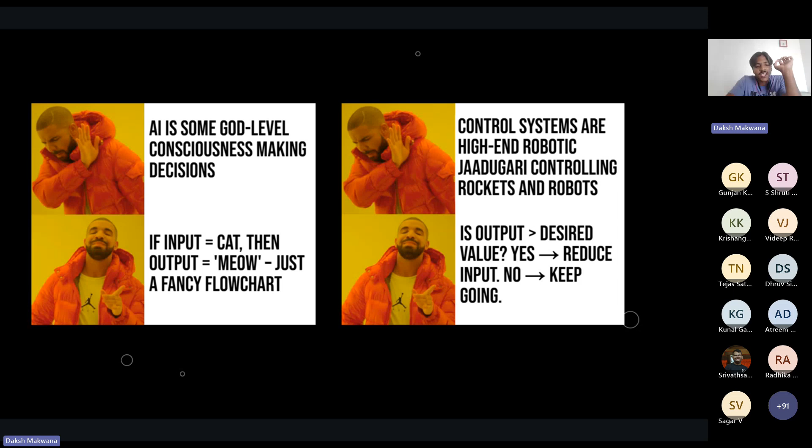And this is what we will be learning in this webinar. So let's start. The first question will arise like, why learn control system? I'd say because it's deeply related to AI. If we get to the highest level of ML, at the core, they are just: if input is this, then output that, otherwise do some other task. Control systems are almost deep down the same, but better. They are AI, but in the physical world - not just thinking about a prompt, but acting on it instantly and accurately. So we'll first understand what really is control and why it's needed.

Let's walk through a scenario. Imagine you are in your room and it's really hot. So you walk up to a room cooler and switch it on. Now it's too fast, so the fan of that cooler is making irritating noises, so you reduce the speed. Then it's too slow, so you increase it. And you do this until you've got that sweet spot in which the room gets cool and you're comfortable also. So what's really happening here?

You are taking the role of a controller. You sense the current state of how hot the room is, and based on that, you are adjusting the input to the plant using those regulators. And the output, which is airflow, gets changed accordingly. And this right here, my friends, is a control system.

So in this control system, there are processes occurring, and the control systems have one purpose: obtaining a desired output with the desired performance given a specific input.

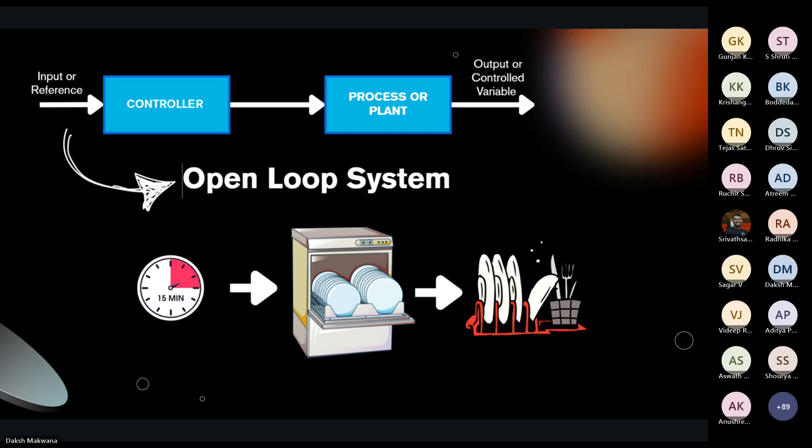Now we'll talk about how to control the output exactly by explaining these controller blocks and their types. Suppose you get H6 as your hostel, and you want to go from H6 to H15 for secret purposes, and I'll assume that it's 50 meters apart. So here you are, let's discuss.

This is the diagram we discussed. You want to walk 50 meters, and here you are the plant. Your brain is the controller, and your output variable will be your current location, and the controller will output a walking speed. Right now you want to walk to 50 meters.

Your current location is 0 meters from H6, so it gets inputted into your brain. One way your brain can think about it is getting the subtracted value, 50 minus 0, which was your current location, and we'll call it the error term. Your brain can multiply this error term by some coefficient, I'll take it as 0.1, and output it as the walking speed. So 50 minus 0 is 50, and 50 times 0.1 is 5.

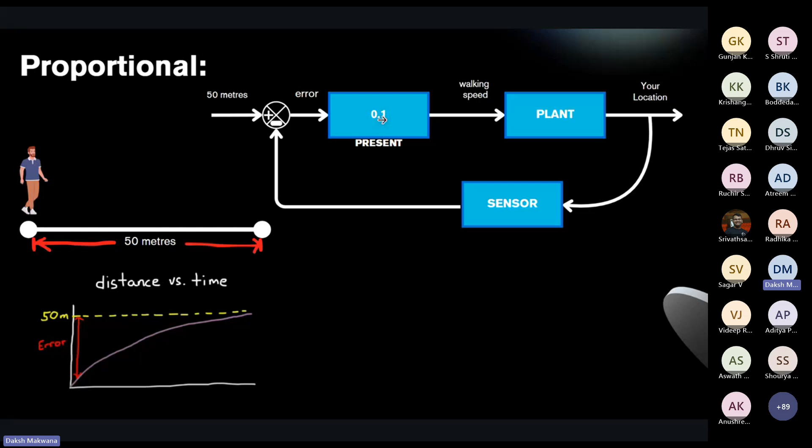This is what I told you about the proportional controller, because it has this coefficient. This is the distance versus time graph. At first your error will be 50 meters, but it will gradually decrease. The walking speed versus time could be like this: initially you are at 5 meters per second, so you're walking fast when you're further away, but then you walk slowly when you're close. Using this, you can kind of reach.

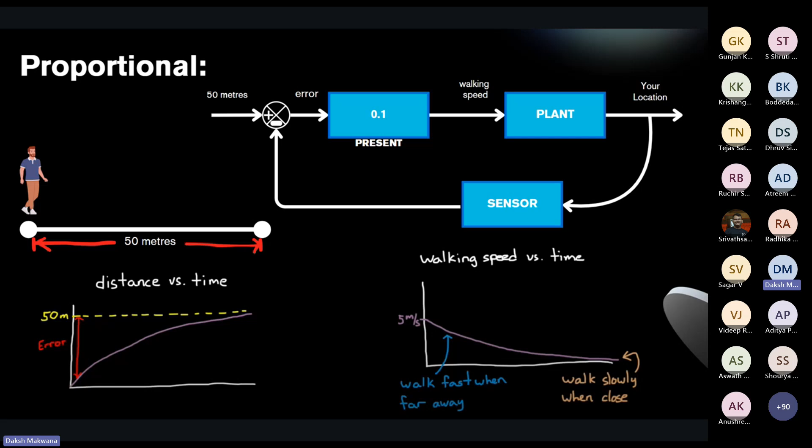Okay, but is this enough? Let's talk about a scenario in which it might not be. So drones, you might be familiar with it, in MS-101 we have created these drones.

So let's say we want to test this. What we want to do is fly this drone to 50 meters above sea level. For context, I'm defining the hovering state, which is nothing but when the lift produced by the propeller is equal to the weight of the drone. So it will neither go up nor down.

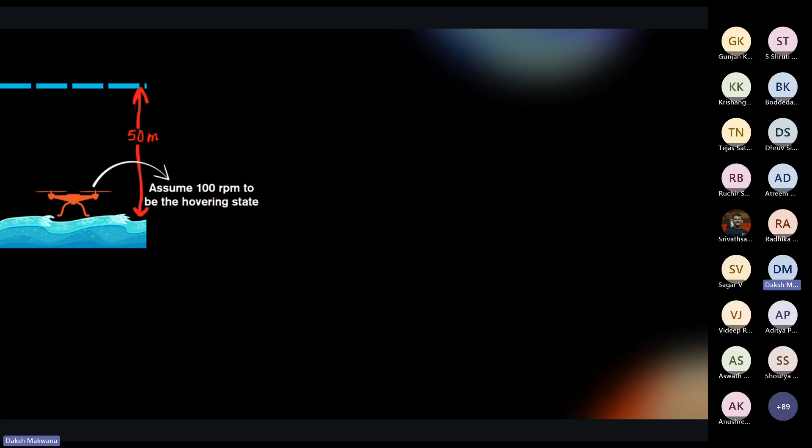This is the closed loop system of this drone, and here the output will be the current altitude. The controller will be like this, and I take 5 for our comfortableness, and it will output propeller speed. So let's just do this again.

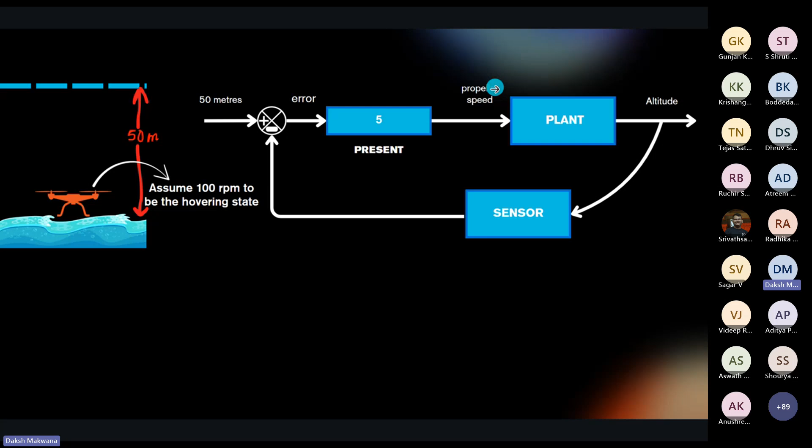Now there can be two cases. Case one is something like this: let's say your drone right now is at 30 meters above sea level. So what do you think happened? The error is 20 meters, right, and the speed is 100 RPM. So anyone want to guess what will happen after this? You can answer in the chat or raise your hand.

As I said, 100 RPM is the hovering state, right? So basically it will just hover. It will get stuck there.

The second case might be: let's say you increase your coefficient or something, and you're able to reach that 50-meter mark. So what will happen now? Error is 0, speed is 0. So what will happen now? Yes, it will just fall.

So what can we do now? In the proportional controller, we use the present information, that was your current altitude. So how about we use the past information? It could be something like this: we introduce the integrator path.

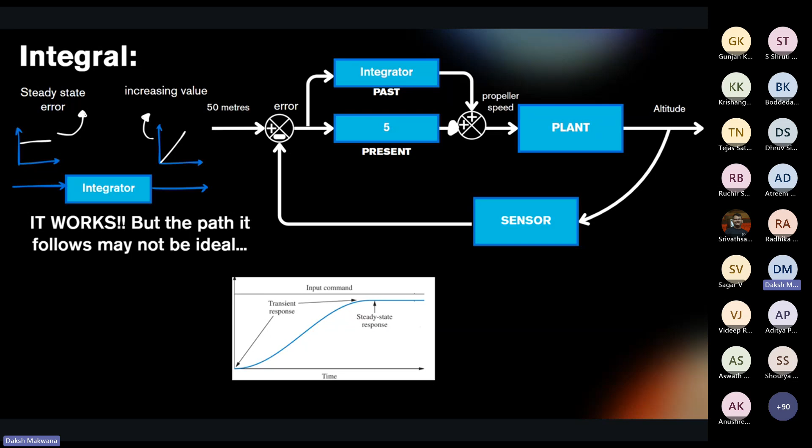But the path that it follows will not be ideal. Why am I saying this? The path should be something like this: you're at 0 meters, and gradually, taking your time, you reach the 50-meter altitude. But I just said something about adding and subtracting values -- subtracting -- so this basically means that this ideal path is not going to happen.

What will happen is, let's say you're just about to reach the 50-meter altitude -- this very small error will mean the proportional controller outputs almost no value. But the integrator path has been summing up values since the start, so the propeller speed will definitely be more than 100 RPM. So it's not going to hover. It will go above the 50-meter altitude, creating a negative error, which will cause it to decrease its propeller speed. By this adding and subtracting of values, it will reach the mark and then hover right there.

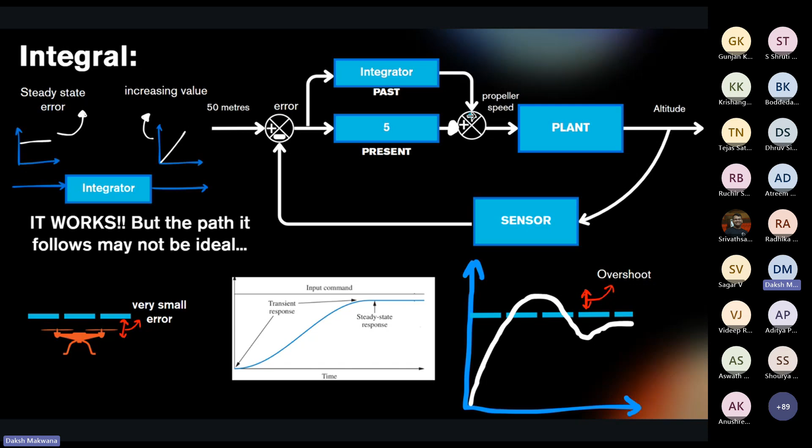So is there any way I can even skip this overshoot? I just want it to ideally reach, or somehow ideally reach, the target. We've talked about the present, then the past, so now it's time to peek into the future. But how? Using the differentiator part. Let's say your drone is quickly approaching that 50-meter mark.

That returns an error which is quickly decreasing, and by the nature of differentiation, when there is a quickly decreasing error, it will generate a negative value. So by joining this with our current controller setup, you get this kind of control system, and the negative value generated will act as a brake for the drone, slowing it down.

So this is the differential controller, and you've achieved it. Whenever the propeller speed increases really fast, the differentiator detects that the error is quickly decreasing, so it decreases the propeller speed accordingly.

So these are the three types of controllers. And if we work with all three of them together, we get a PID controller.

Now that we have the types of control systems and types of controllers, let's see what kind of outputs we can expect if we enter any kind of input. The only way I can think of is to use math, to first represent our system by creating a mathematical model.

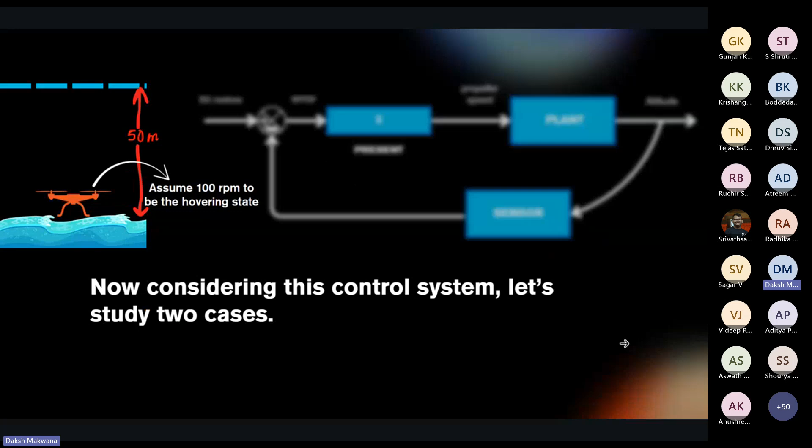So this was the case, right? You wanted to say, why not just increase its proportional value? So let's say I increase it to 100, instead of 5, I'll set it to 100. What will happen? At 1 meter, it will get stuck. It's just like this - you can say you'll increase the proportional value a lot, but it's kind of impossible to get that high a proportional constant value. That's why we use a different kind of approach.

I guess students are discussing among themselves. So no, no, yeah.

Just to clarify, he was asking why we shouldn't be adding a constant to make it hover there. The constant you're adding there is coming from the integral of the previous values.

Yeah, I think it's been clarified, the student clarified it. You can move ahead. So let's move further. If anyone has any more doubts, you can text it, he or she can text it.

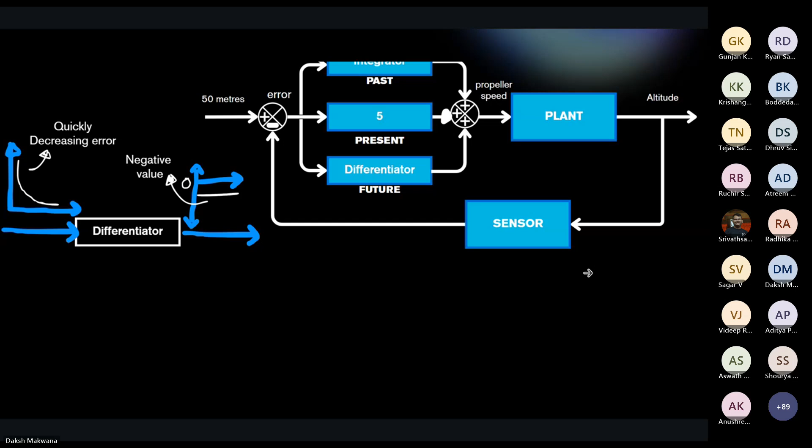So I was talking about how, now that we have the types of control systems and the types of controllers which we've just studied, I want to know what kind of output I can expect if I enter any kind of input. The only way I can think of is to use math to first represent this system, creating a mathematical model so that when we enter input, it gives us the output.

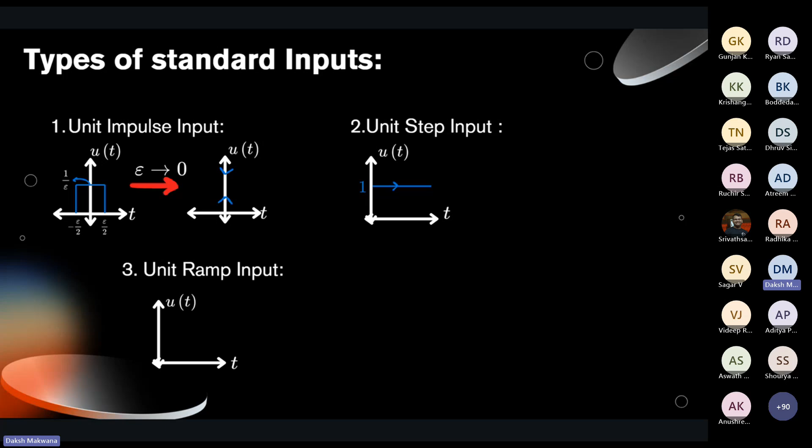And then there's the unit ramp input. It could be explained as the signal here gradually increasing with time.

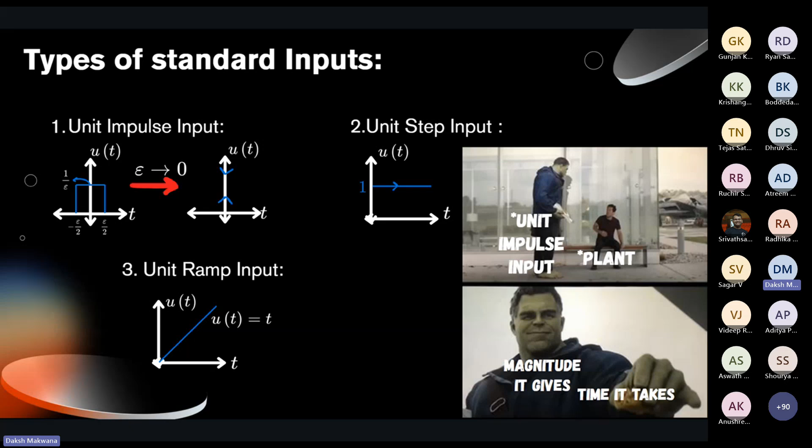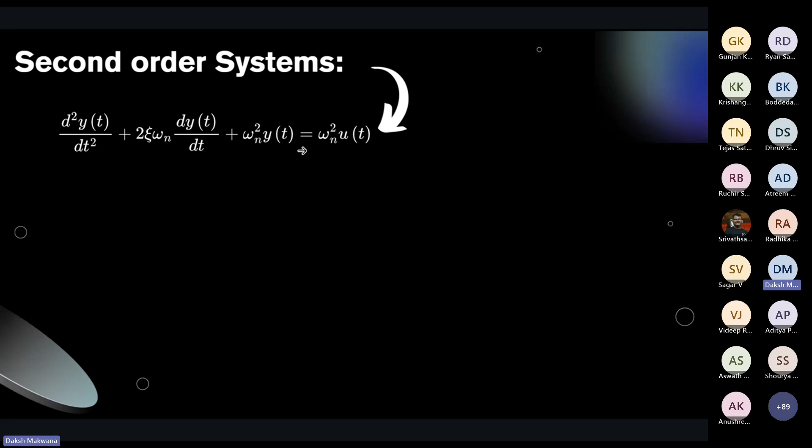So let's do the same here: we'll Laplace it, take all the initial conditions to zero, then rearrange it and get this transfer function.

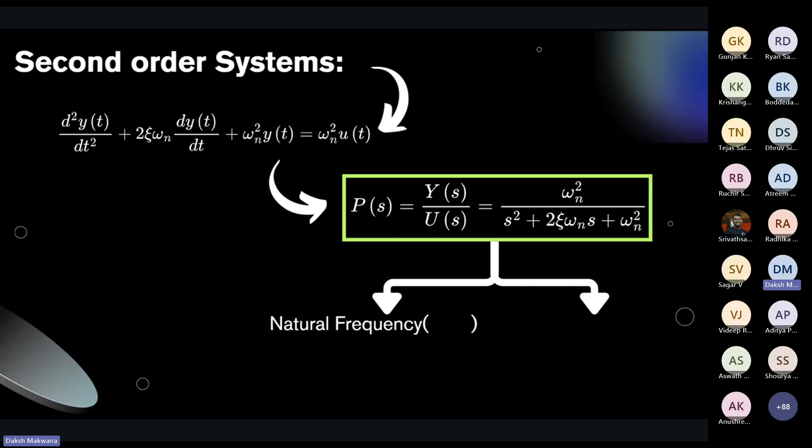So now I've got two new coefficients. First I can see this omega n, and then the second is this Greek letter, xi. So omega n is the natural frequency, which can also be explained as how much the system wants to oscillate, and the damping ratio is how much the system wants to resist that oscillation.

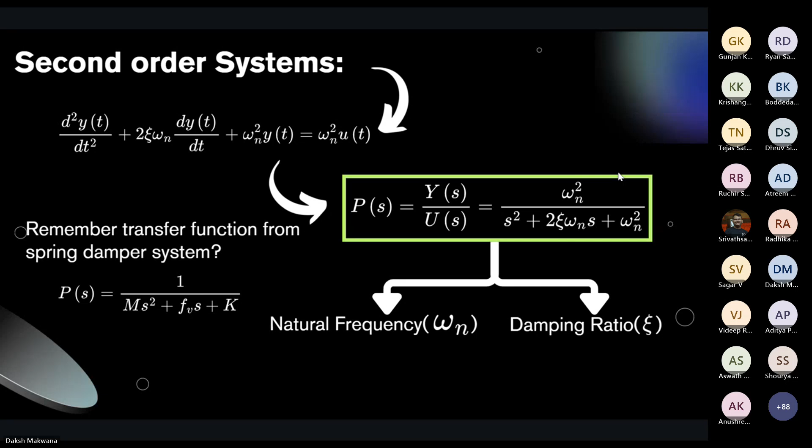You can tell it in the chat. So the transfer function is here. You just need to get it in this form and tell us the natural frequency and the damping ratio of this transfer function.

Are you answering for natural frequency or damping ratio? Natural frequency is kind of... if it is the natural frequency, root k by m, yes. This is like I studied something like this in JEE also.

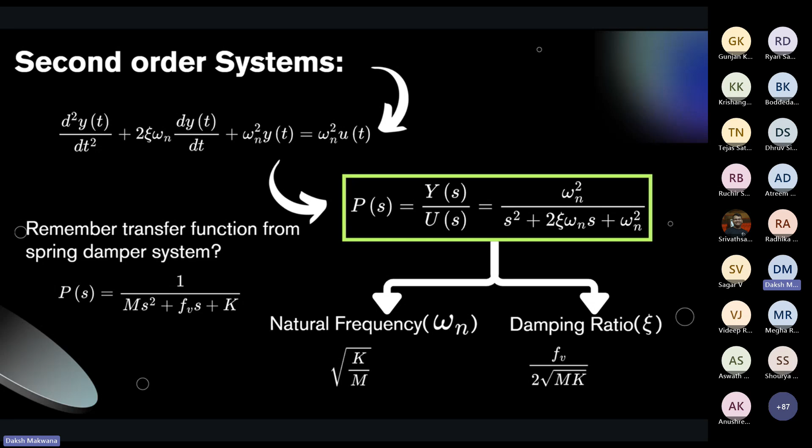We can understand this by going into more detail. So what will be the poles of the system? Poles of this transfer function? Can anyone text it in the chat or say it in the mic? Because I think typing will require more time.

Hmm. बताओ guys, इसका poles.

If there's any problem, the poles, what were the poles? They were the roots of this denominator function. Okay, so you just gotta apply the quadratic formula, and you'll get the poles of this transfer function.

And I didn't tell you one thing, right? So it's that the natural frequency and the damping ratio both will be positive. Why, if I say so, is because I just talked about the physical significance of it. So that just makes sense, that for the system to be stable, we need both of these positive.

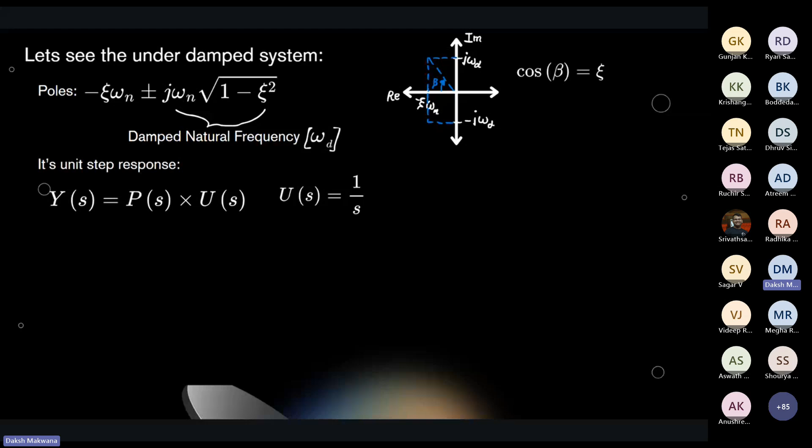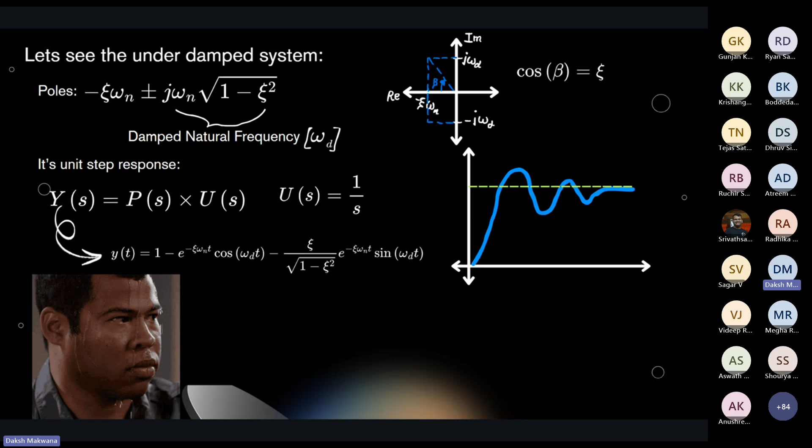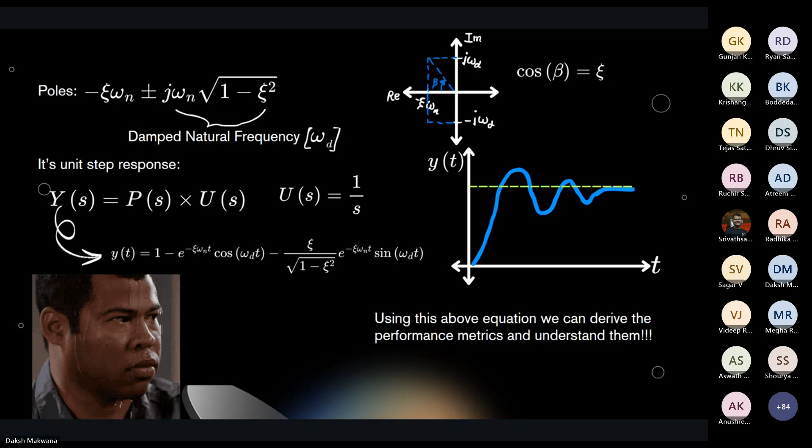So still the use of that second key, which was zeta, is still left, right? Let's say I've used that key also. So what I'll get is the performance metrics. They are really the measure of how good our system is. And these metrics, my friends, are really important. So let me take you through these metrics.

So this was our input, and this was the response, I guess. You can see four terms here, and then this one. So first I'll define an error band: the space between the steady state value, which can be plus minus 5%, 2%, or 1%. That's called an error band.

So first is the rise time, TR. It is the time taken from t equals 0 to the time the system response takes to reach its final value for the first time. The final value will be 1, which we could guess by the equation.

And the peak time, TP, is the time the system response takes to reach its maximum value for the first time. And the maximum peak overshoot, MP, describes how much the system response has jumped above the final value, which is 1. Then the settling time, TS, is the time the system response takes to enter the error band and never leave after that.

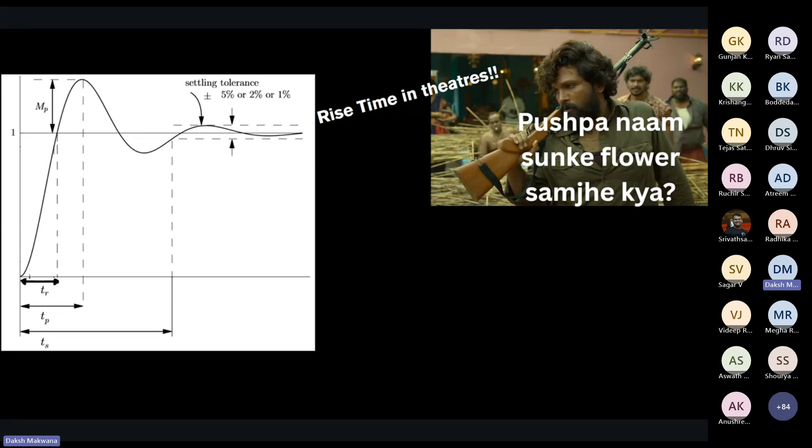So you can think of it as when Pushpa was saying this dialogue, the momentum was increasing in the theaters. And then after that, when he says this dialogue, the overshoot happens. The crowd is like, whoa.

Okay, so I'll quickly describe these metrics. Rise time is the time the system response takes to reach 100%, and this could be solved by finding the t for which y of t equals 1 for the first time. So here is the formula you finally get after solving. Yes, there's a lot of math, so I'm going to drop it down.

So can anyone tell me what will happen if I increase the zeta for this system? You remember zeta, right? So what will happen to this rise time if I increase zeta? You can text it in the chat box.

बताओ guys, और बताओ. क्या हुआ है हर्षवर्धन? Yes, Rahul, right, you are also right. Anushri, right, nice guys, everyone is paying attention on this. Everyone is paying attention. So yes, you are right.

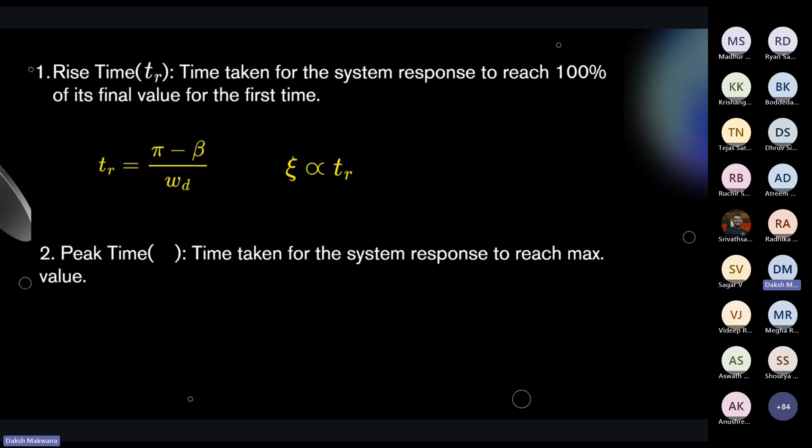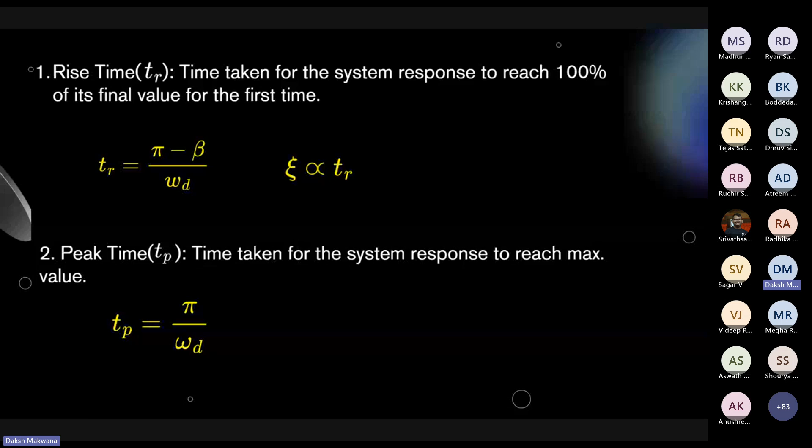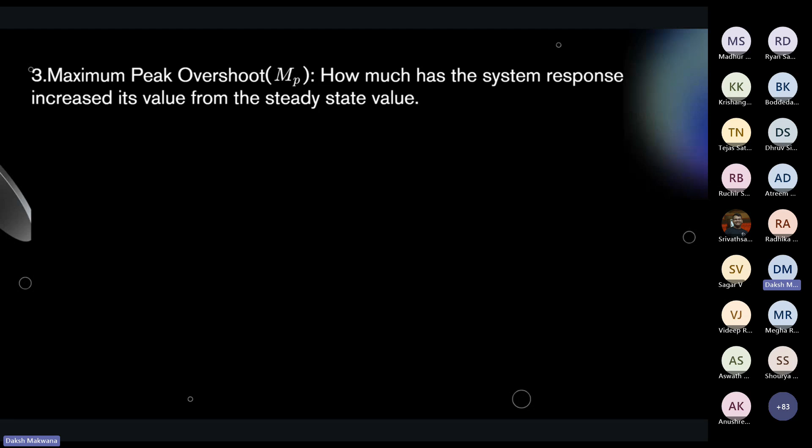Next is the peak time, the time the system response takes to reach the maximum value for the first time. So TP, this is the peak time. Not that interesting, I would say, but yes it's important, just not right now in my explanation. Next is maximum peak overshoot, which is how much the system response has increased its value from the steady state value. So the formula for it will be this, after solving it again.

Nice, nice. Sorry Saxena, you are correct the second time. Gunjan also, Kartikeya also, Rohit also got it. Everybody should get it.

Yes, you're right. So whenever we increase zeta, the value of maximum peak overshoot decreases. So can I find any physical significance of it?

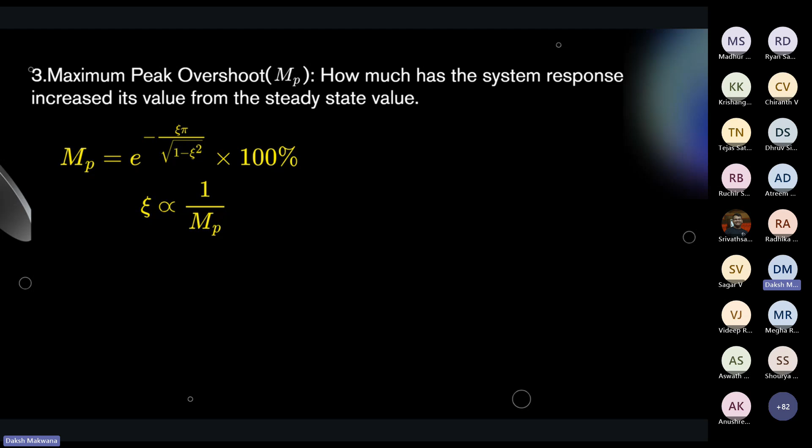Let's say I am building an automatic door, not a sliding door but a proper pull-push door, and I'm making it automatic. Let's say I increase the value of its zeta. So when the door gets closer to the frame, the maximum peak overshoot or the wobbling of the door will decrease significantly because I've increased zeta. But what will happen now? It will take a lot of time to reach the closing frame.

On the other hand, if I decrease the value of zeta, the rise time will also decrease, which means it will reach the closing frame really quickly. But that will also result in so much hardcore wobbling of the door. So this is like the hand-in-hand relationship between maximum peak overshoot and rise time.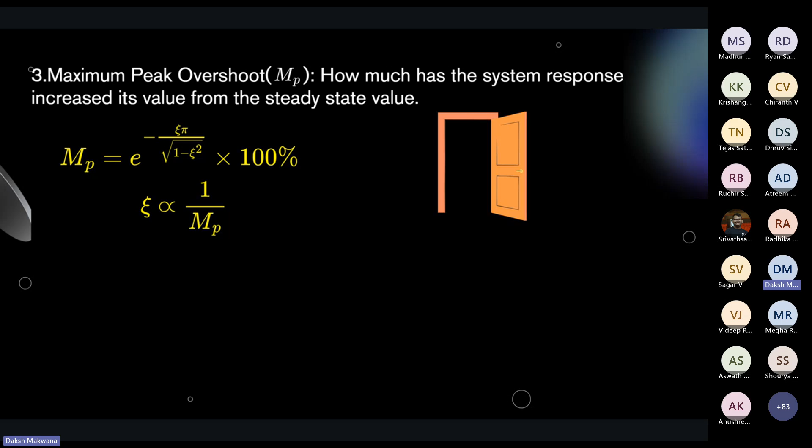So yes, zeta is our second key parameter. This is why it's important, to tweak between maximum peak overshoot and so on.

And finally, the settling time is the time the system response takes.

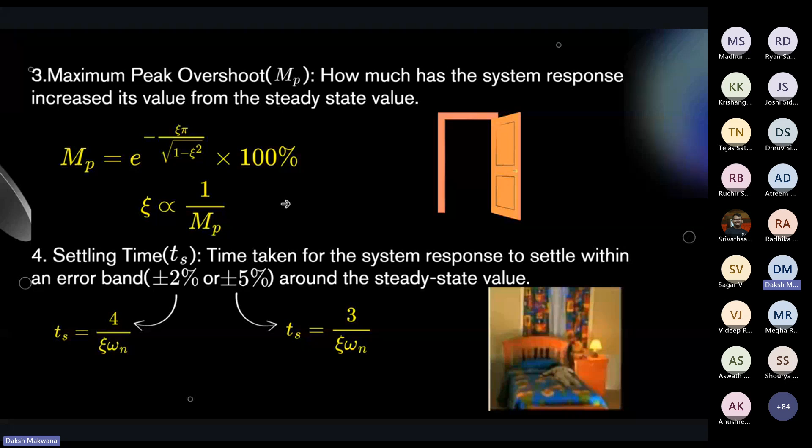That was my session, guys. Thank you for your valuable time, and I hope you found something insightful from this session.

Now we have got our controllers and our metric systems all ready. So what you're going to do in week 2 is use these metrics to tune your controllers, because there will be some error - because life doesn't really run without error.